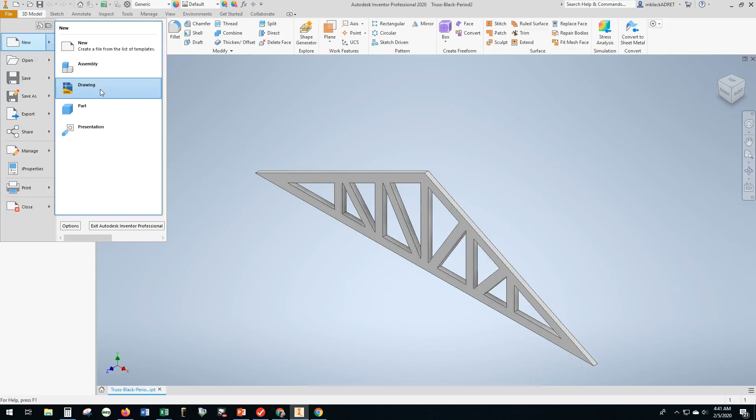Now that our truss part file is finished, we want to add this to a drawing. So we're going to go to File, New, Drawing, and make sure you choose the one that says .dwg at the end. And here we have a new sheet.

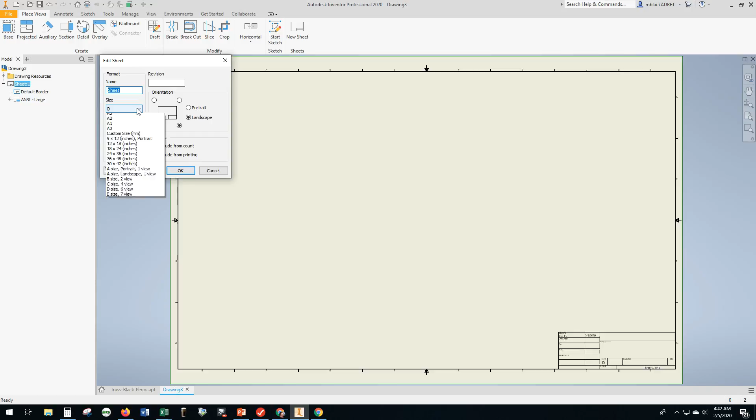Now this sheet is huge, it's 24 by like 30. So we want to change that to something that we can print in our printer. We're going to right click on Sheet over here in the browser, and we are going to choose Edit Sheet and change it to A. Makes it 8.5 by 11.

Okay, so now it's something more manageable, and we want to change the title first of all. So let's go to Annotate tab, and we're going to choose the text tool, and we are going to drag a little text box here.

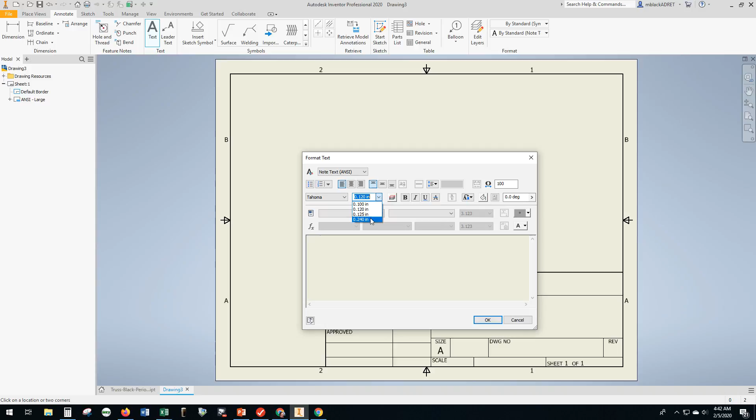I'm going to change the size to 0.24 inches, and I'm going to type my last name. You type your last name and enter, and I'm going to put Truss. If you want to change that to your first and last name, that's fine, however you want to do it. Click OK. Now it says my name down there.

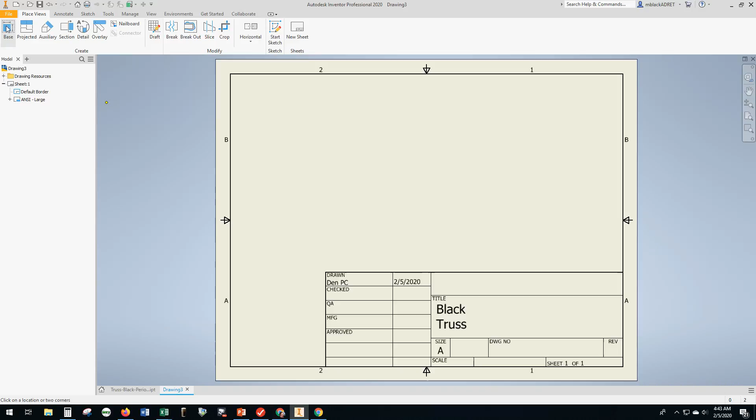Okay, so let's start placing our trusses. Go back to the Place Views tab, click on Base. Now, because I have my truss already open, it pops up there. But if for some reason your truss does not pop up, go over here to the Browse button and find it in your drive.

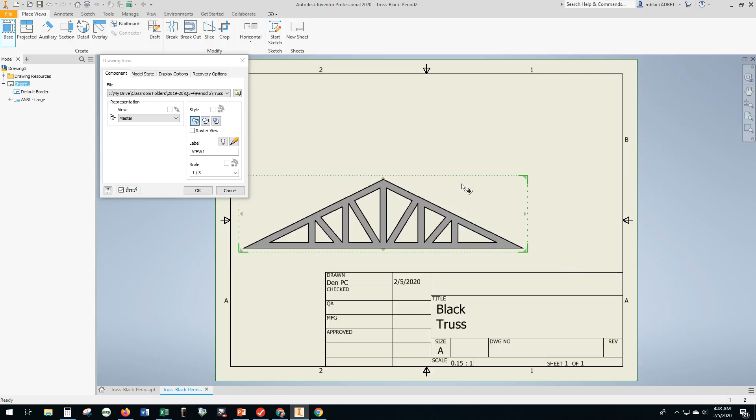Okay, so once you have it here, we're going to drag it over a little bit. We want the front view, which is good. And we're going to change the scale. Let's look at 1 to 2 - that's a little bit too big. So I'm going to click here, backspace, and hit 3. That's a little bit more manageable. And I'm going to drag it about where I want it, I'd say about there.

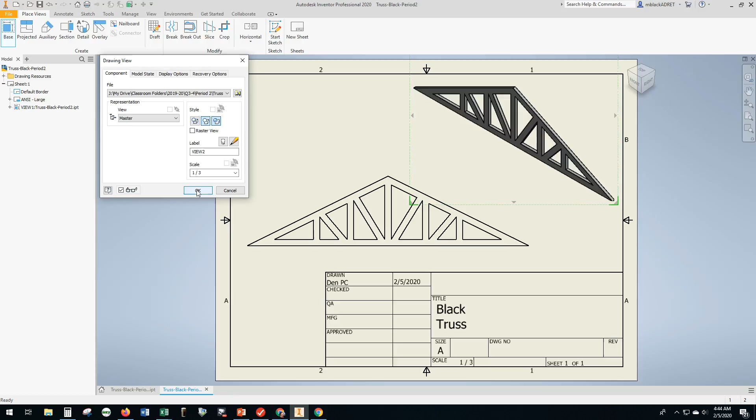All right, so now we want to put an isometric view, so hit the base again, and this time drag it up here in the corner. We want to hit the home button here so that it's an isometric view. And again, change this to 1 to 3 and kind of drag it up here in the corner. We also want to click on this button here that says shaded - that'll keep it shaded like that so it looks a little more three-dimensional. Click OK. If for some reason you didn't hit the shaded button, you can hover over this until it turns a red border around it and double click, and you can still click on shaded.

All right, let's add some dimensions to this. So if we go back to the Annotate tab, hit the Dimension tool, and let's start with the bottom. We're going to click on the bottom, drag it down, and click again. I'm going to go ahead and type in the apostrophe or the quotation mark to make it inches and hit OK. I also want to go from here to here, click, and type in inches.

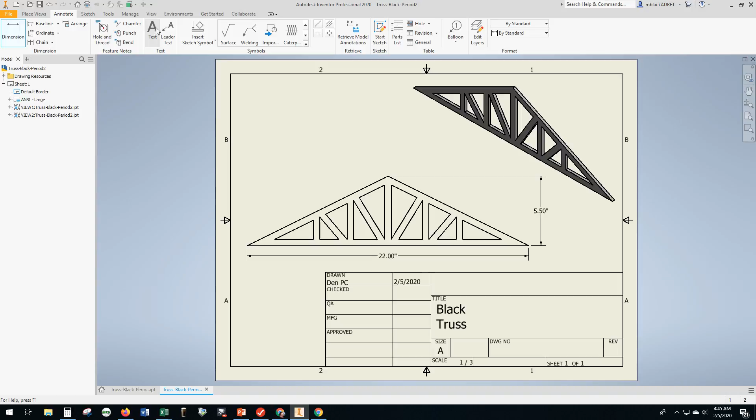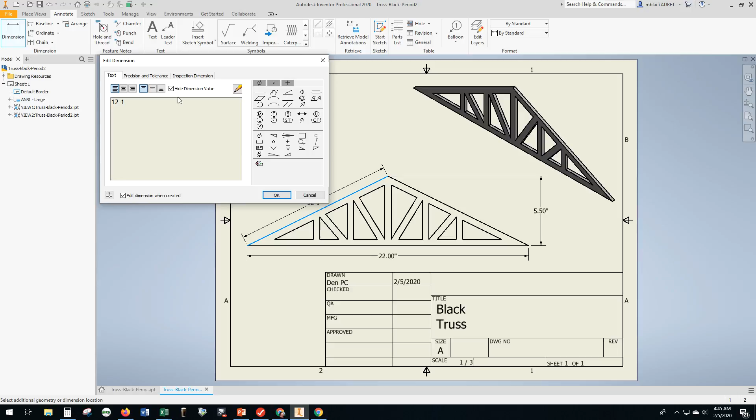Okay, and one more thing, let's do this one here. Again, we're just clicking on the side of the line. And instead of having the 12.3, which makes little sense to us, click Hide Dimension Value. Let's type in what we already know will be 12 hyphen, actually we'll make it 5/16 inches. And if this box pops up, just click OK and OK. Now we have a more reasonable number there. So everything looks good, that's what we want - our dimensions are on here.

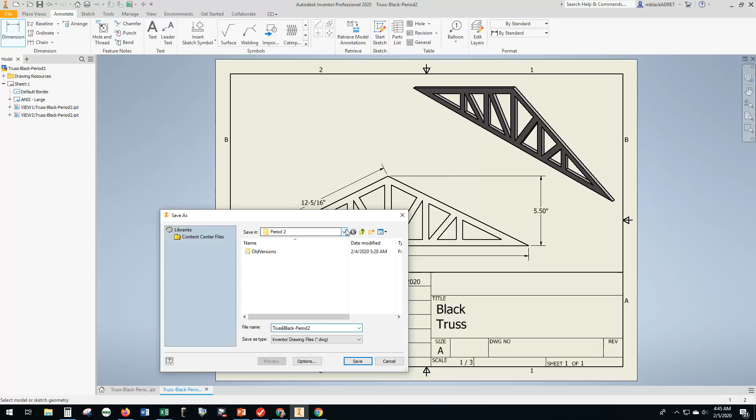Now we want to just go ahead and file, save, and again, keep it under your classroom folder. Call it, instead of Truss, this time we'll call it Truss Drawing. And click Save. Now we're ready to print. So that's creating a drawing file from your parts. Hopefully this makes sense and you can get this finished and turned in to move on in your project.